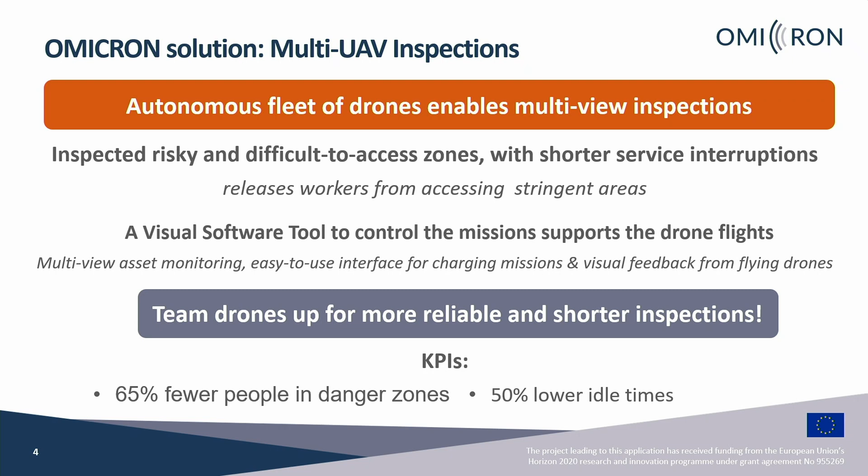Let us concentrate on the topic with OMICRON, in which essentially we have a fleet of autonomous drones. I will reinforce the word autonomous because they are completely autonomous. They can work in parallel, they can accelerate the process, but they can also obtain different complementary views and increase the resolution of the inspection. So you can see, for example, here, there is a bridge to inspect. We want to inspect over the bridge and also below.

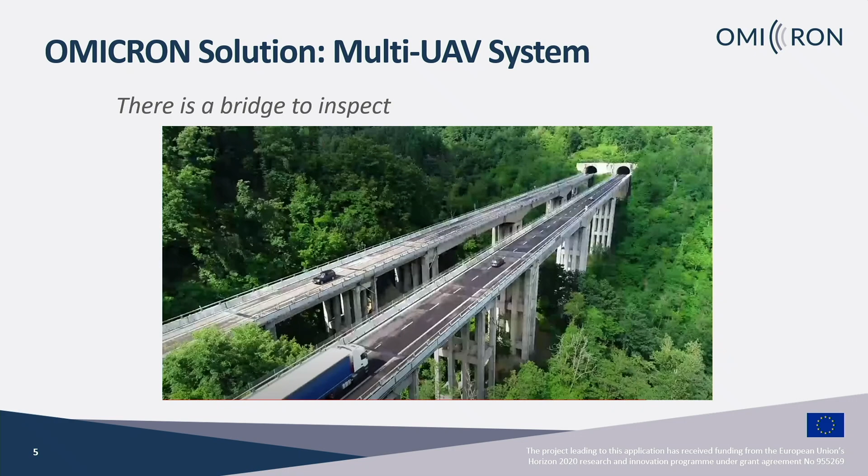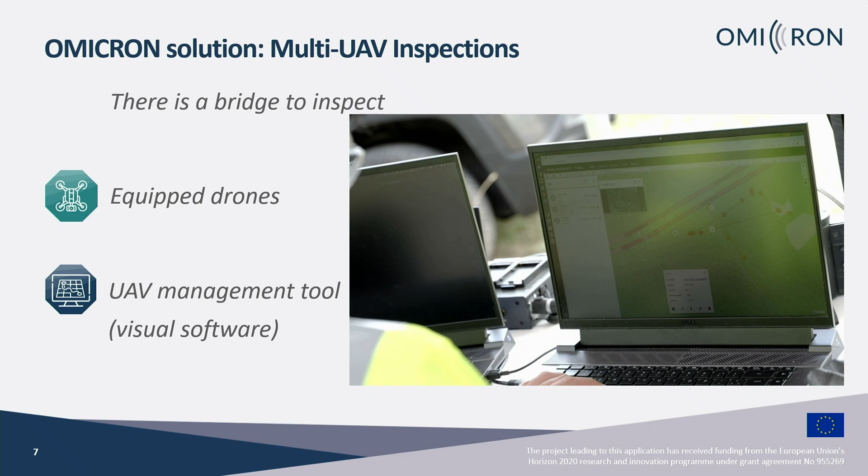So you can see the drones, you will see more details later in the next presentations, with camera, communications, and other systems. And then we can have a ground station in which you monitor. They plan the trajectory for all of them, taking into account not only the basic capabilities dealing with, for example, the energy, but also the possibility to recharge the battery and to take into account the wind, which is very important for the energy. So you can see here how there is a monitoring of the full team and how they collaborate. And in this management tool, you can not only launch, but also monitor. But everything is autonomous.

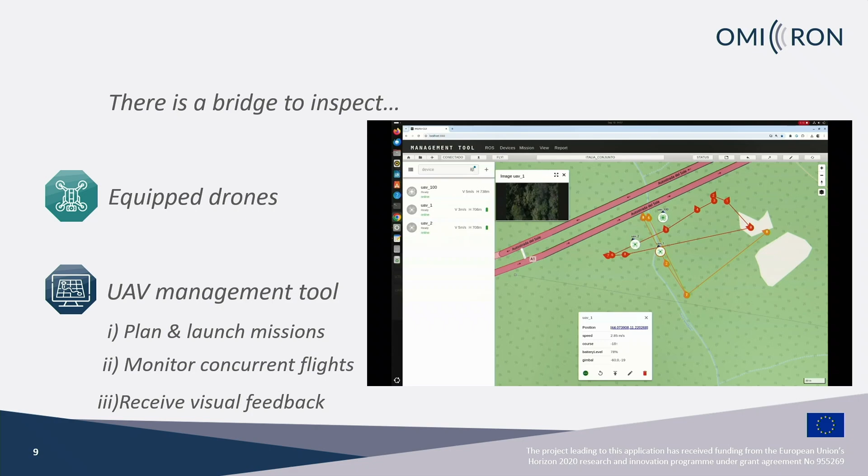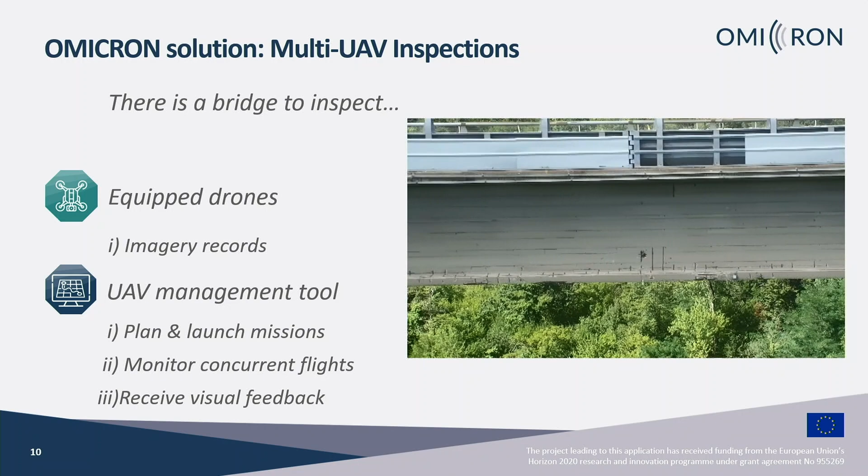Then you can obtain views like this with different degrees of detail. And then it is possible to detect different images and collect images, and even process these images in real time. So you can see these images here, in the bridge, or here you can see details, and you can also look at close views. You can even enter very difficult-to-access sites and obtain images that cannot be obtained in other ways.

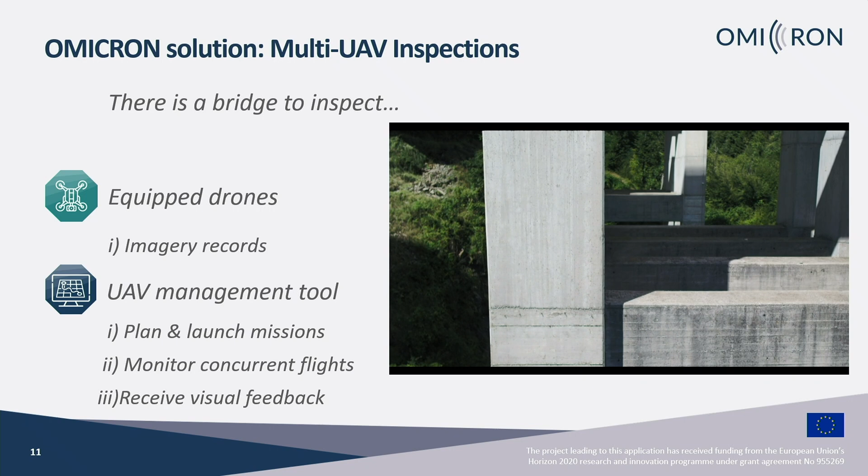I have no time to detail here, but in any case, you know the technology. I am trying to introduce the technology. And also, I would like to say that there are some kinds of aerial robots that are able to fly, but also to land and to inspect by contact. But this is another topic that I have no time to mention today.

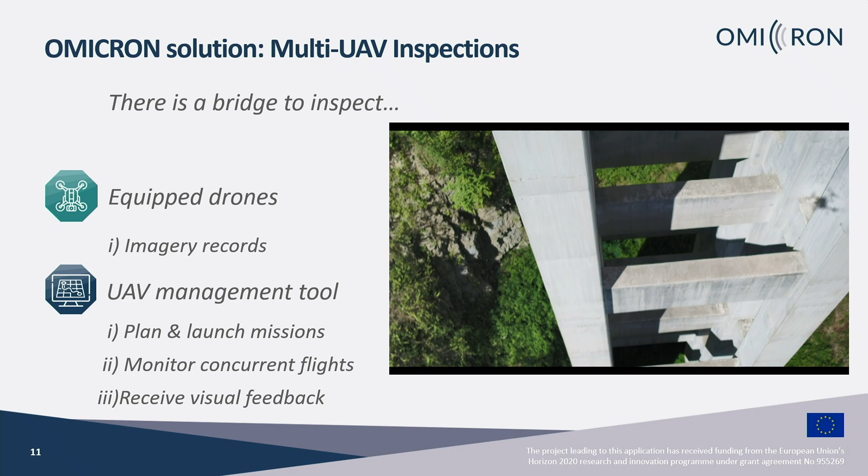So here you have essentially seen the technology. I think that this technology, we can say, is reliable. This technology is ready to be used, is being used, and I think that we can adapt it for the different kinds of companies that have some constraints and some particularities for the inspection. But this can also be done.

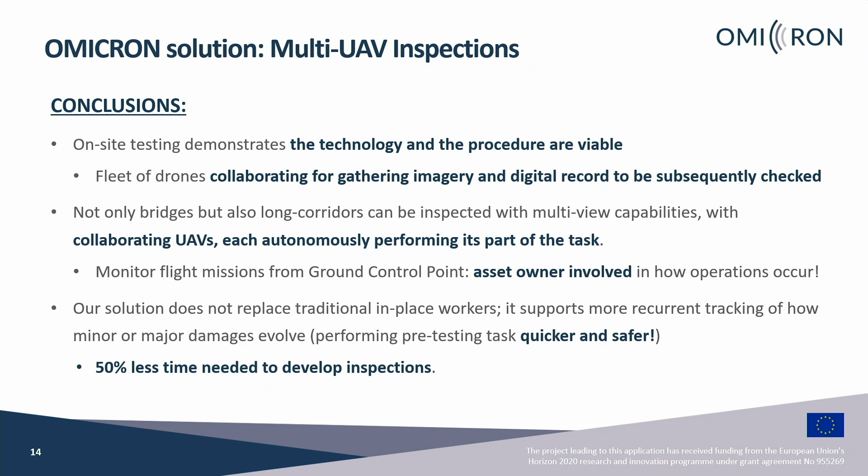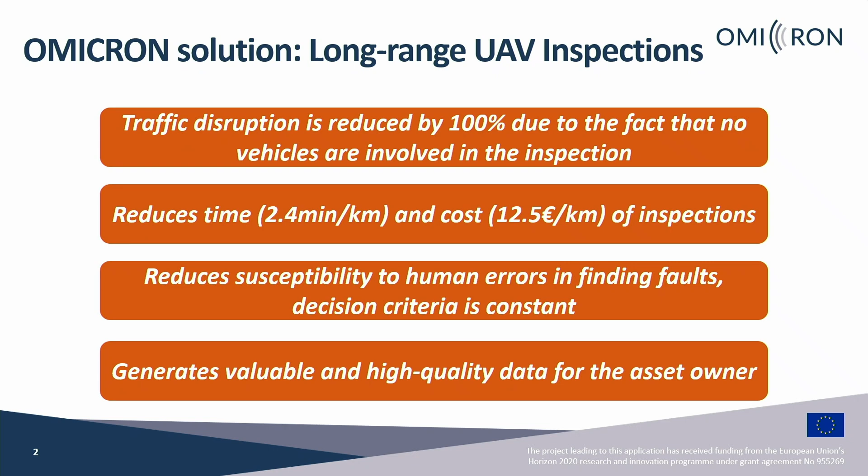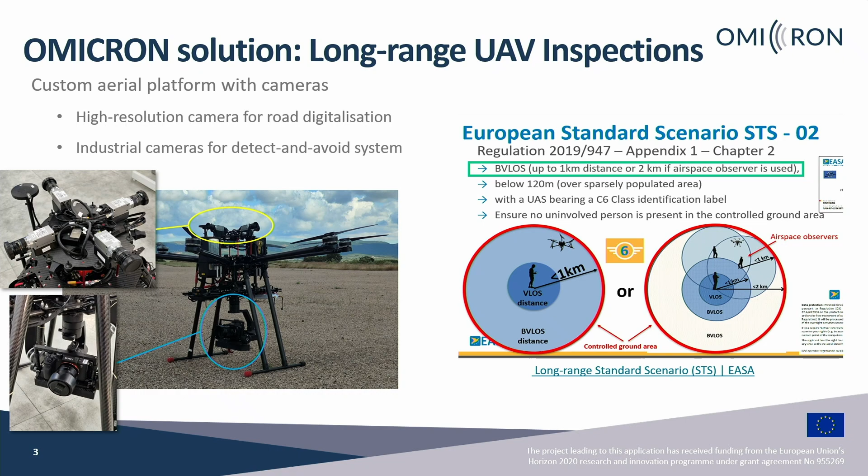And also we have a huge dataset of images from the road in this case. So we have been working with a custom UAV with 2 different lines of work. The high quality camera is for the road inspection, and the other 4 cameras are for the long range, because when you are flying beyond visual line of sight, you have to have airspace observers on the ground, and if you don't have these people, you need a system to monitor the environment. So you will see this in the next slide. And this is the reason for the top cameras.

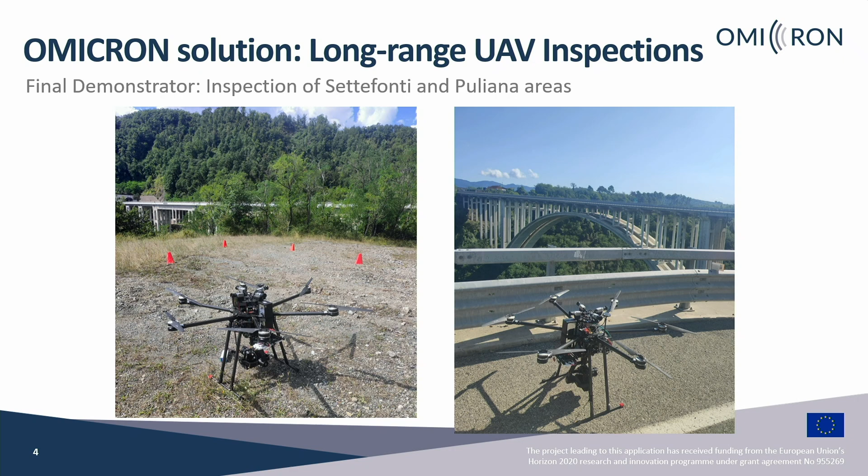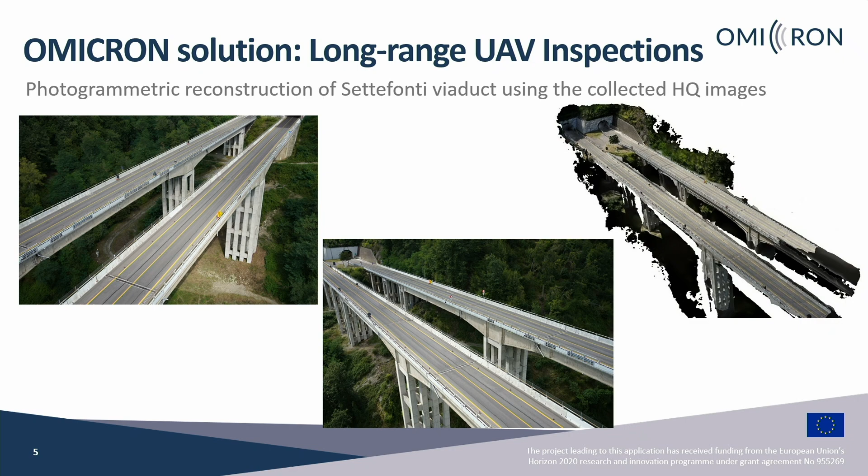So in this case, we have been testing in Puliana and Settefonti with the UAV. These are some pictures from the high quality camera. And the last part is the photogrammetry model of the viaduct. We have 6 millimeters of precision in the data. In Puliana it is more or less the same.

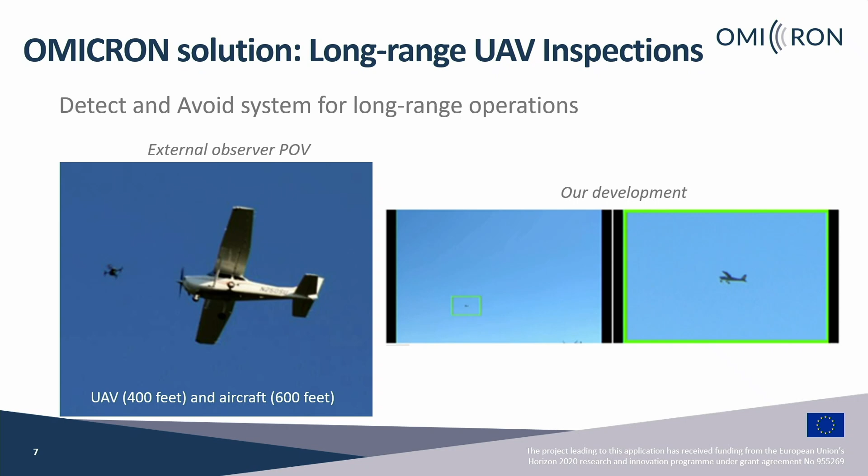This is the reason for the top cameras of the UAV. For airspace observers, it is difficult to see where the drone is, where the possible threat is. So it's better to use an onboard device and process this information. This is the test of the detect and avoid system with the UAV and an ultralight aircraft. And we tested flying more than 1 kilometer. There are some data of the inspection.

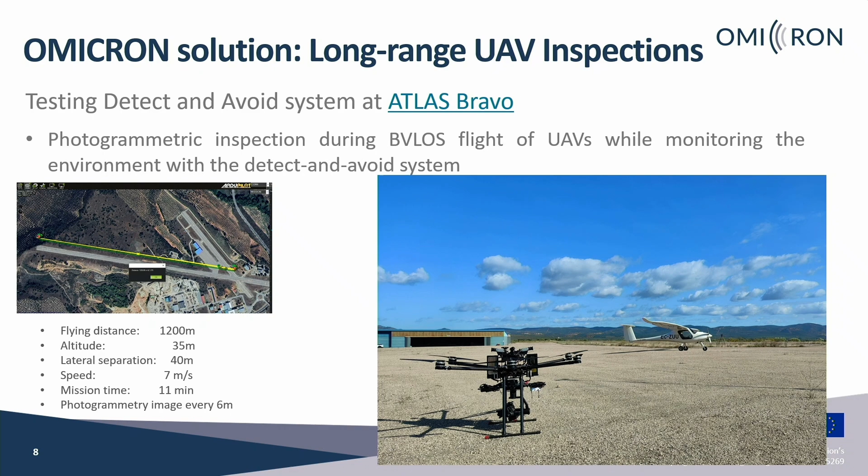And this is the whole system working. So we have the 4 cameras, and while we are inspecting or monitoring the environment, we are taking a picture every 6 meters of the road. And then you get the orthomosaic, doing the photogrammetry and the point cloud.

I don't know if some videos are playing or not. Yes, no.

It's the avoidance maneuver: when you see the threat, you lower the height of the UAV, and when the aircraft has passed, we return to the original mission.

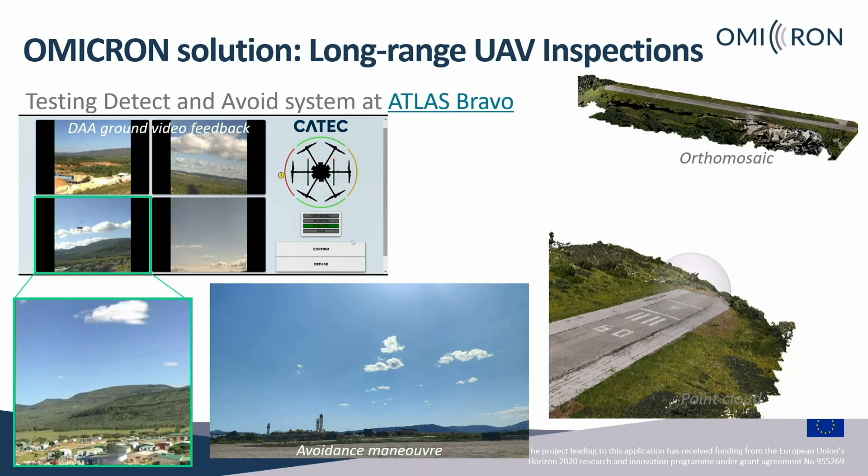And the next actions are, one of the most interesting is increasing the battery efficiency in order to get more distance. The same with the second bullet point, using lighter and smaller devices to get more efficiency and get more distance. And the use of solutions like drone in a box to do regular inspection, because this is a box that you can put in some place with electricity and internet connection, and it autonomously does the inspection that you have programmed. So it's very interesting. We have some projects with this type of device now.

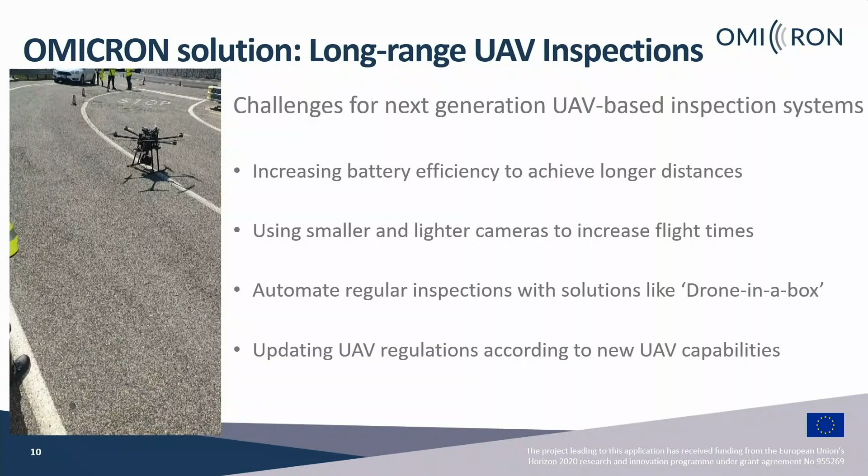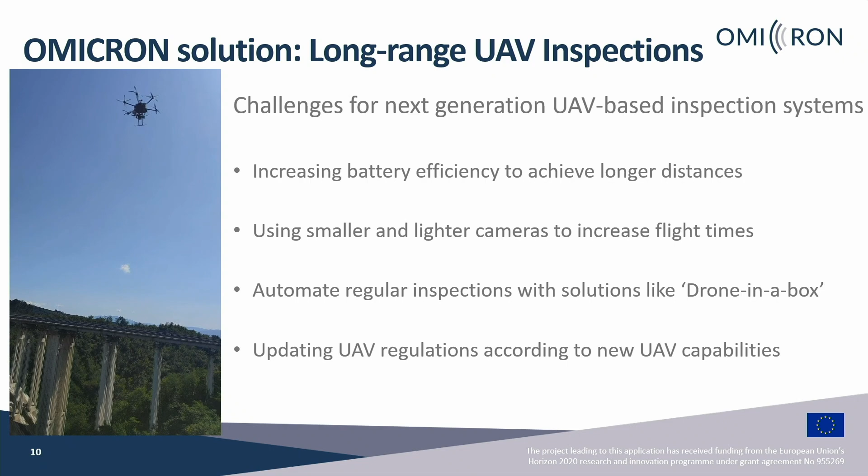Obviously, last but not least, the regulation on the operation of UAVs is very restrictive, and it is too difficult to fly long distance. It's very, very difficult. It's about 6 months to get the permits to fly long distance. So this is one of the most restrictive points. I think that this is all.

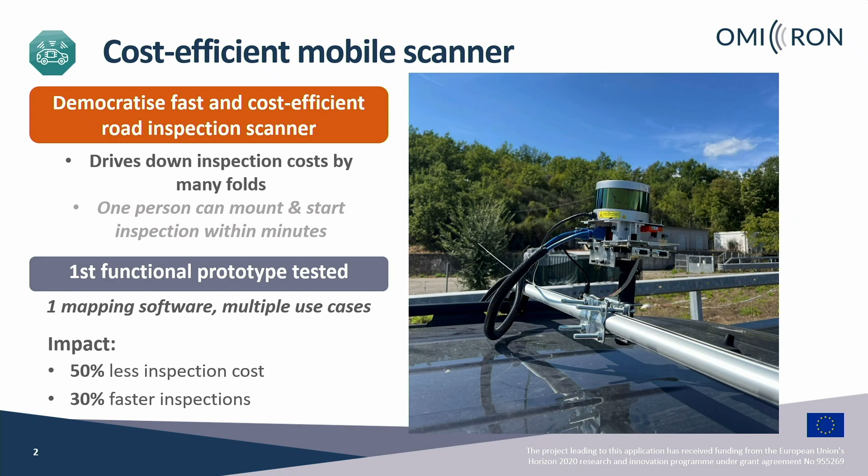And today I'm just going to talk about the PointPix system that we developed in Cambridge. In Cambridge, the focus for us is to cut down the price so every authority is able to use this system in their profession. I mean, if they want to use it for the roads, for the bridges, or for whatever purpose they have. So in this case, we need to design this system from scratch. Every sensor that we are considering should be designed by the designer, and not only the hardware, but also the software should be developed to optimize the cost. So our aim was to cut down the inspection cost by 50%, and also 30% faster inspections.

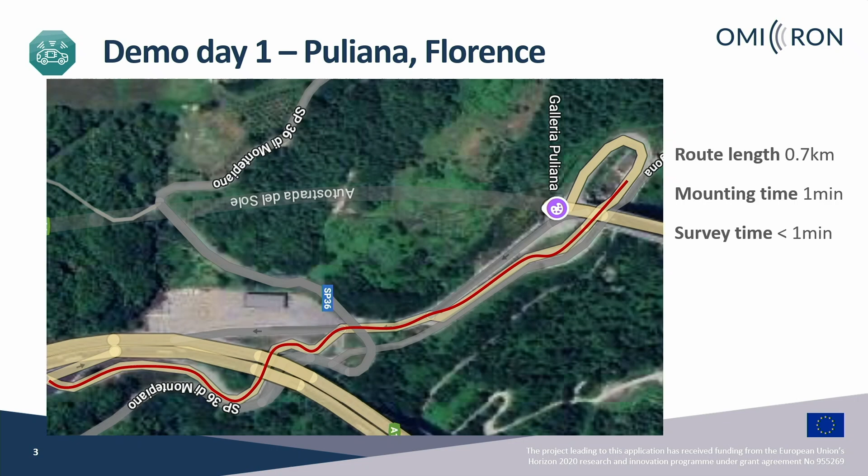We have implemented 2 demos. One is Puliana in Florence, where the route length is less than 1 kilometer. Mounting the equipment is quite easy, based on the design that we have developed. You can simply mount it on the roof rack of the car, and it just takes 1 minute to mount it. And then you can see that it takes less than 1 minute to inspect the area. And we gather the data like this. So the point cloud data we capture is like this.

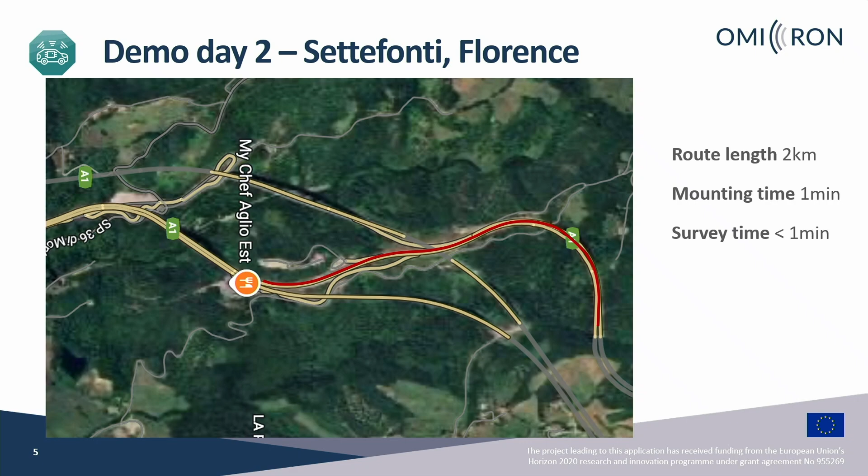The second demo is Settefonti, again in Florence, but this time it is around 2 kilometers. The mounting is the same, but again you can see that in less than 1 minute we can capture the point cloud data for the roads. And this is the data we already captured.

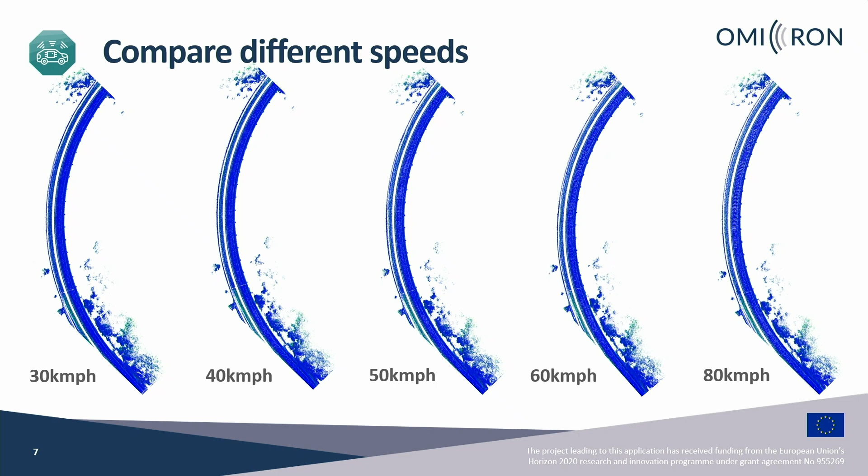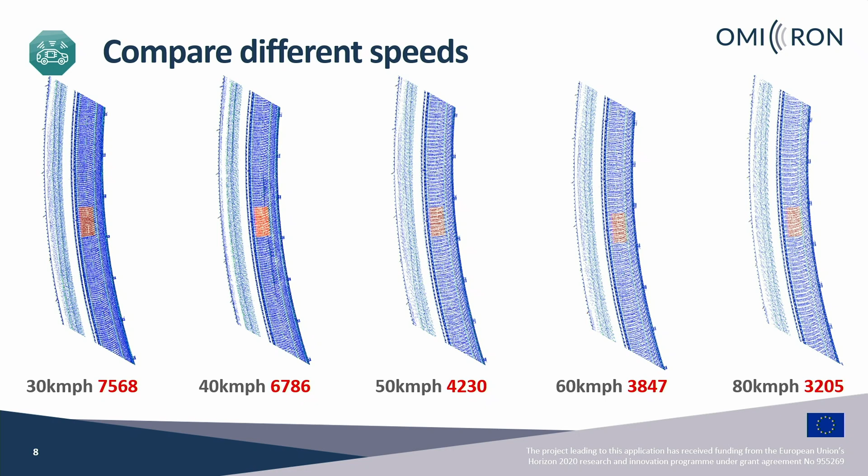But you might probably ask at which speed we can capture this data. This is really important because the faster we go, the less data we capture. So we implemented it from 30 kilometers per hour to 80 kilometers per hour. So as you can see, the faster we go, the less point cloud data we capture. But it doesn't matter because we're going to focus on the mapping data, so in this case it works properly. But as you can see, at 30 kilometers we can capture around 7,500, and at 80 kilometers it is around 3,000, almost half. So if we want to be more accurate, we should definitely go a little bit slower.

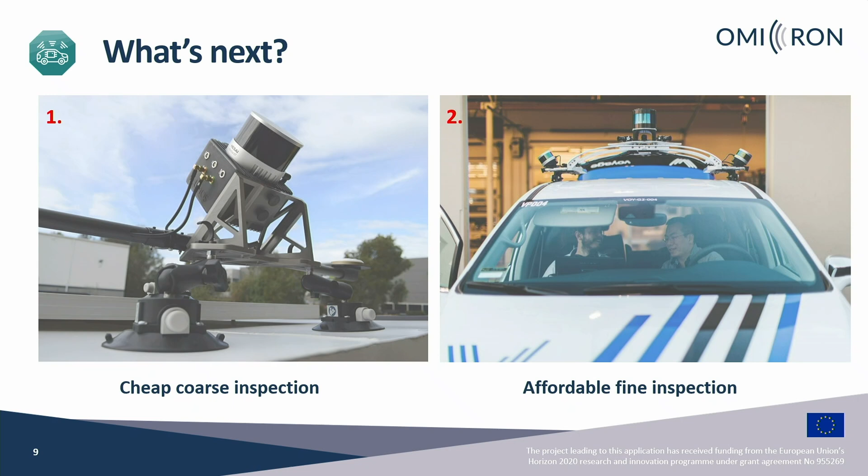What's next? Considering what we've learned from the OMICRON project, we're going to have 2 aspects. The first is the cheap coarse inspection, and the second one is the affordable fine inspection. That means we need different kinds of HD cameras, mid-range LiDAR, accurate GNSS, and on the other hand, we also need multi-LiDAR, multi-camera, highly accurate, for the fine inspection.

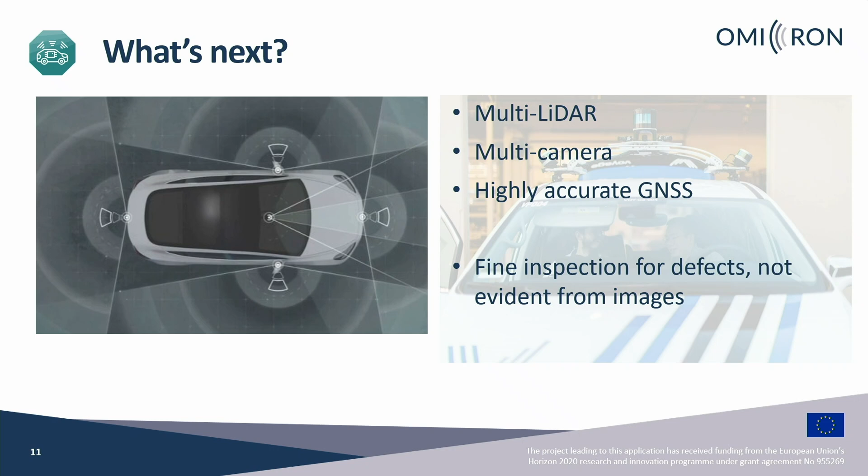We are also developing other things, like if recent cars have cameras installed, we can use this data to capture all this kind of stuff and reuse these HD cameras on cars to provide a fast initial inspection for defects. The other thing I wanted to mention is that we are currently developing image scanning for the coarse inspection and LiDAR scanning for the fine inspection.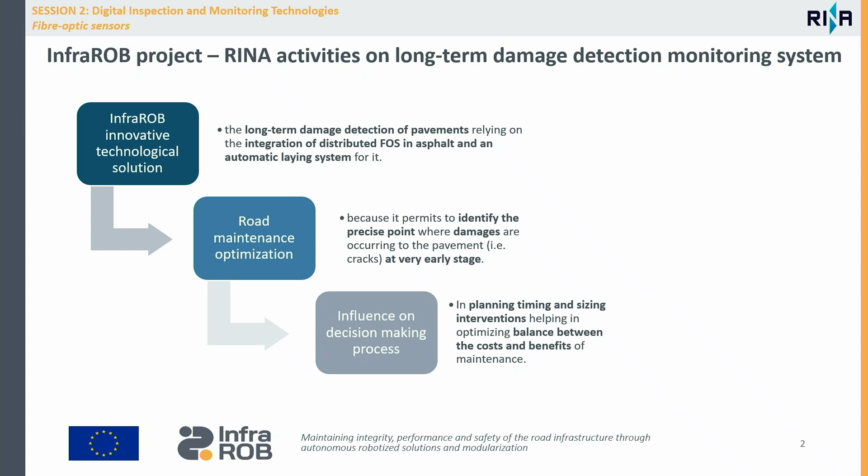The main goals of this solution that need to be achieved for the fulfillment of the InfraROB project are the following. First of all, the capability to withstand the automatic laying process that stresses the cable during the laydown. The capability to withstand the asphalt pavement realization process, which reaches high temperatures and can also damage the cable due to the aggregates. The validation of long-distance application for this technology, and also the integration of the data collected within the InfraROB dashboard for pavement damage detection monitoring.

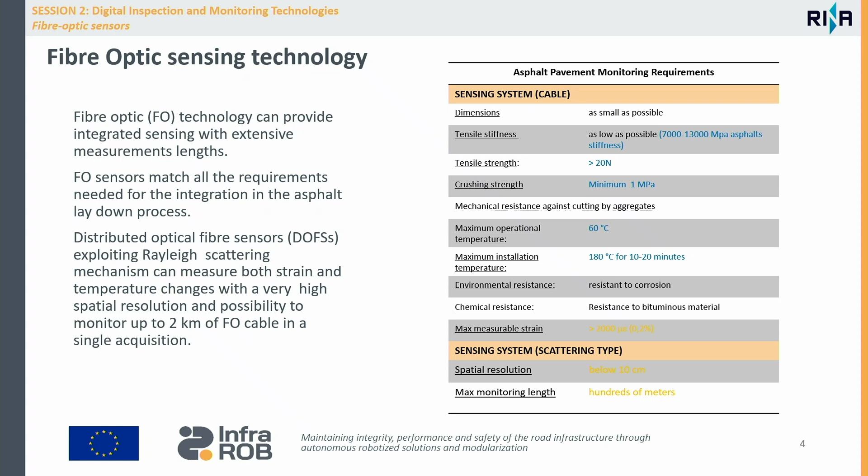This fiber optic technology can provide integrated sensing with extensive measurement lengths, offering unique benefits such as small dimension, lightweight, long-term stability, corrosion resistance, electrical passivity, immunity to electromagnetic and radio frequency interference, and also the capability of intermittent readings and the interconnection between these readings. The characteristics of this solution can match the requirements defined within the InfraROB project for the monitoring system.

This kind of monitoring system, embedded in the asphalt automatically, was designed following four steps. The first one was the selection of commercial fiber optic sensors that need to fulfill some requirements related both to mechanical strength and to temperature. Then the survival test of this fiber optic cable to the asphalt production and compaction processes, and also the interaction of the fiber optic cable with the asphalt by means of petrology asphalt tests. And finally, these fiber optic cables were validated from a mechanical point of view through some flexural strength tests.

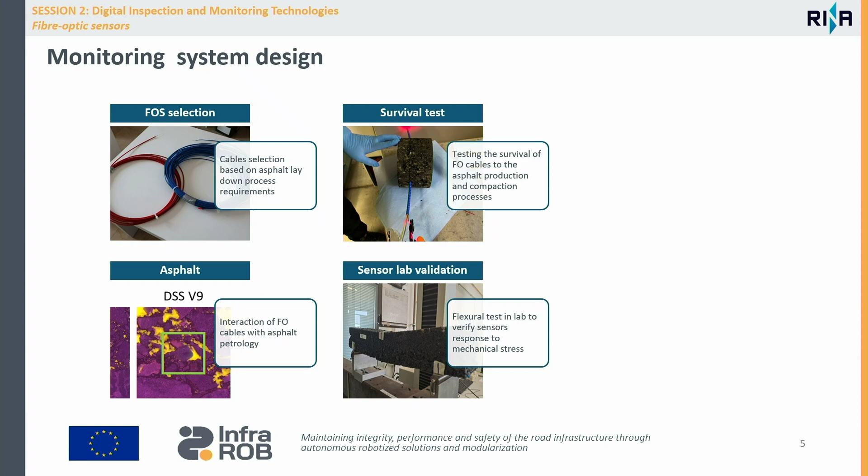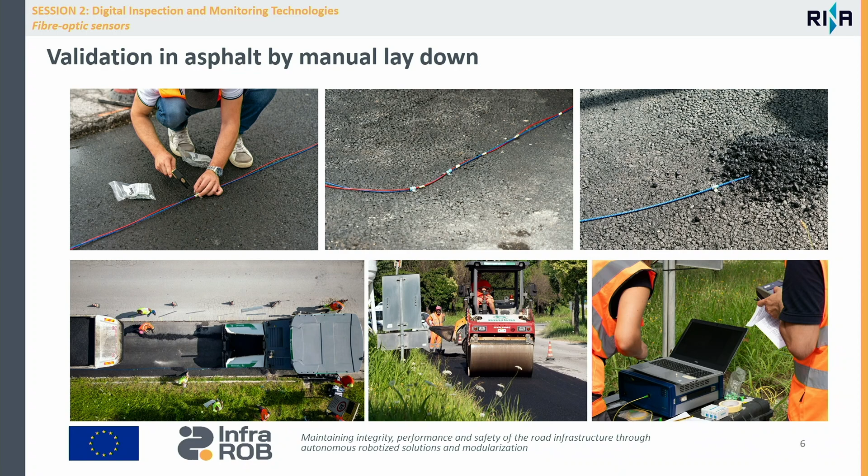During this activity, both strain and temperature acquisitions were collected. Both these values were monitored during the asphalt laydown process, as both kinds of sensor were embedded in the asphalt. In this way, we could also see the advancement of the asphalt process upon the sensor.

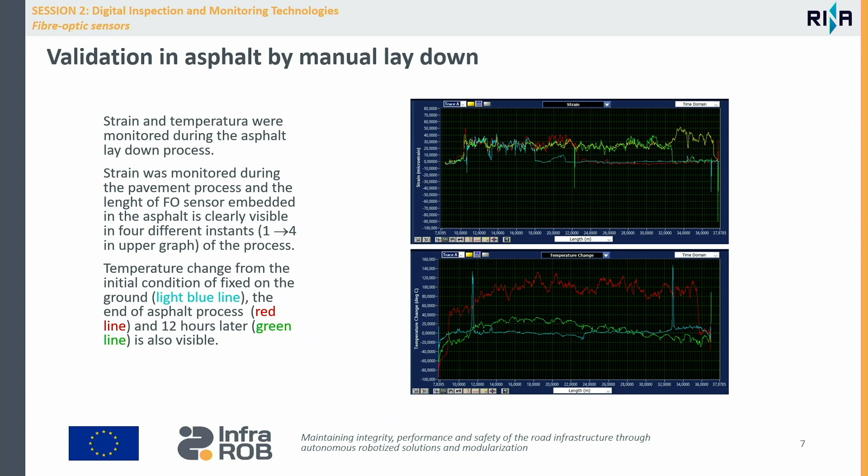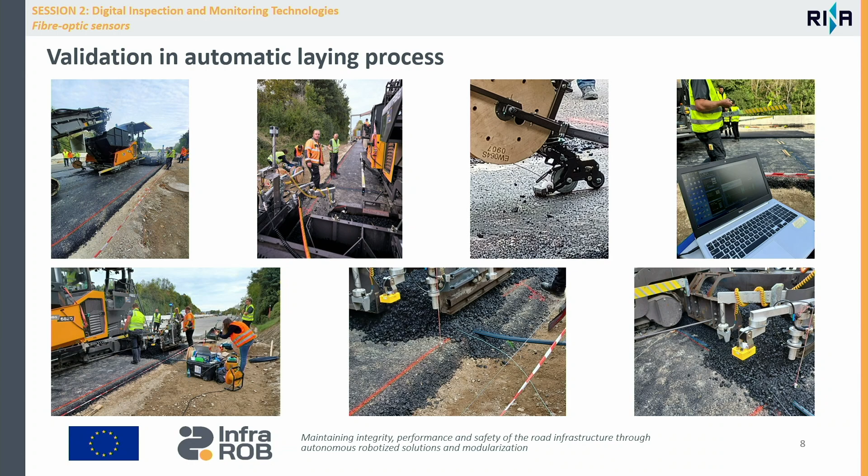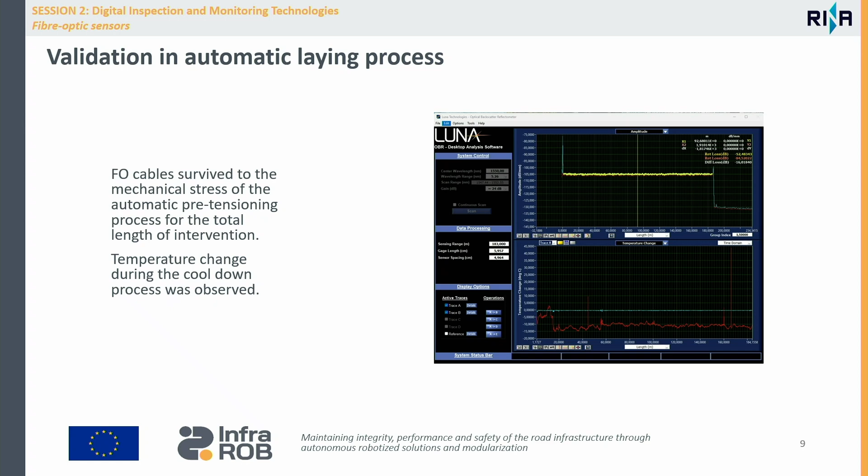In particular, we collected during this activity some acquisitions for temperature and also for strain that can be useful in the future to evaluate damage and reveal cracks in the asphalt. Unfortunately, the time of the project is not long enough for this system to evaluate damage during the project. But during this test, we fully demonstrated the technology and the survival of this cable during the process.

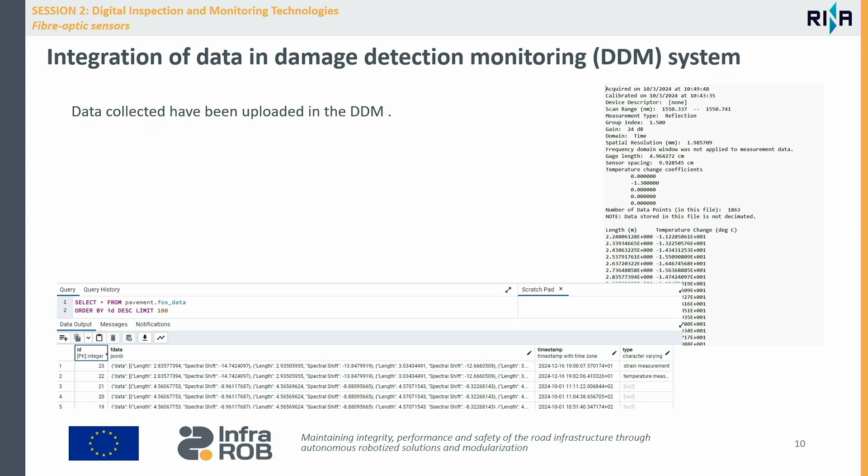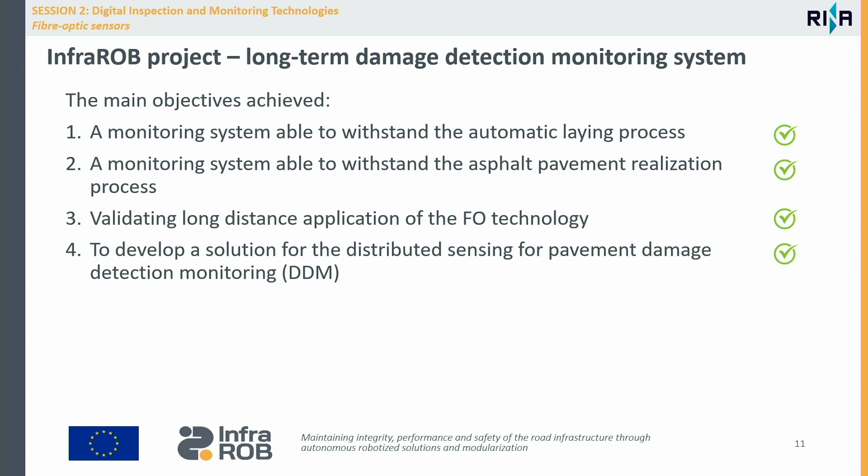Here you can see a screenshot of the data that we collected during the activity and integrated in the InfraROB dashboard and in the InfraROB database. And so, as demonstrated, all the goals and objectives of the InfraROB project that we showed before have been achieved: the capability to resist the automatic laydown process, the capability to resist the asphalt pavement realization, and also long-distance application.